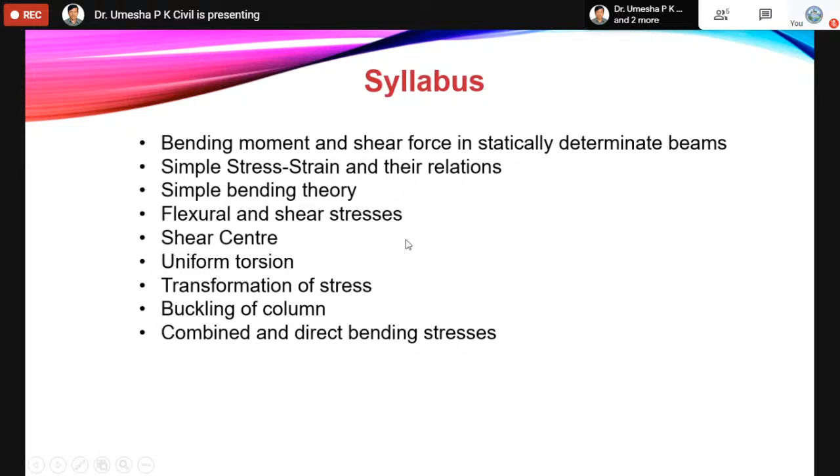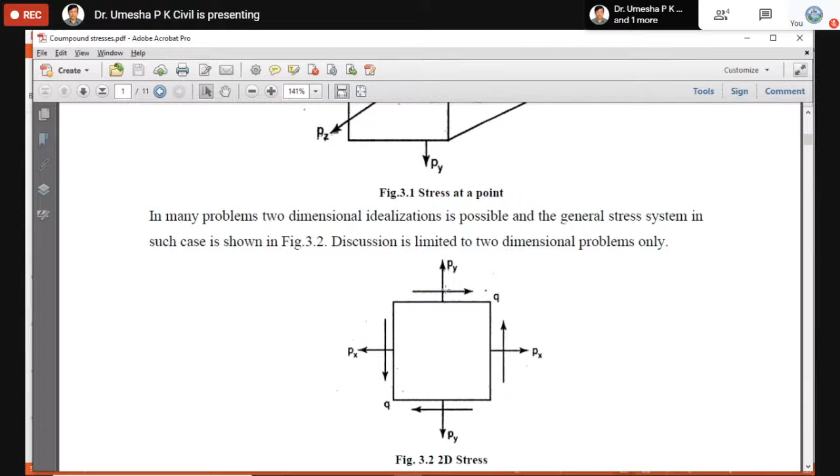We are interested to consider this idealized as a two-dimensional problem. It will have stress in X direction, stress in Y direction, and also shear stress Q, present on all four sides. That is the idealization to the two-dimensional problem.

So if you see the stress on the inclined plane, we are interested to know what is the stress on the inclined plane, that is the normal stress and the shear stress, if it is subjected to uniaxial direct stress, biaxial direct stress, and also general two-dimensional stress.

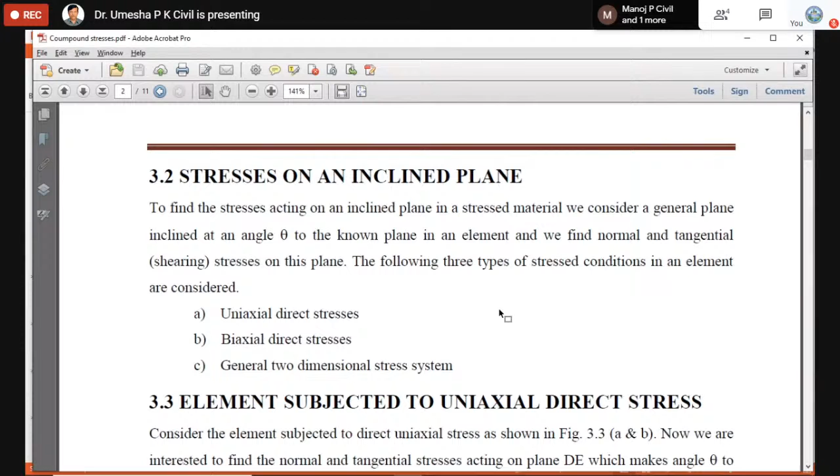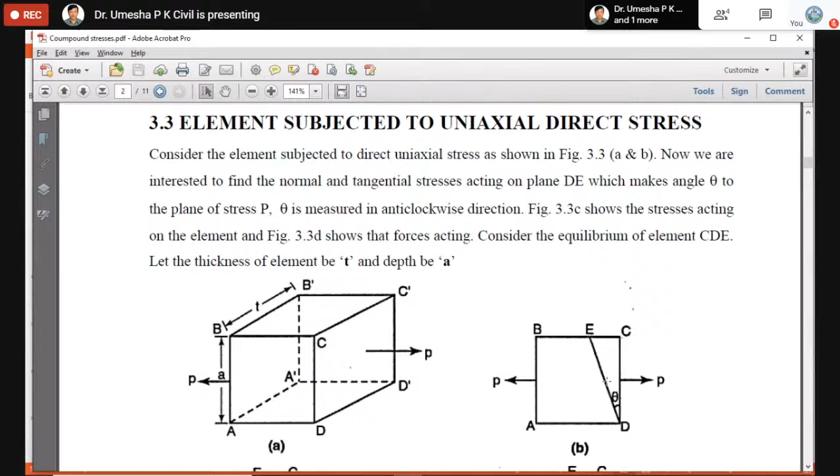Firstly, let us take a case subjected to uniaxial direct stress like this. We are interested to know the normal stresses at a plane inclined at theta to the vertical plane. P will be the value acting in the X direction. We are interested to know what is Pn, the normal stress, and the tangential stress.

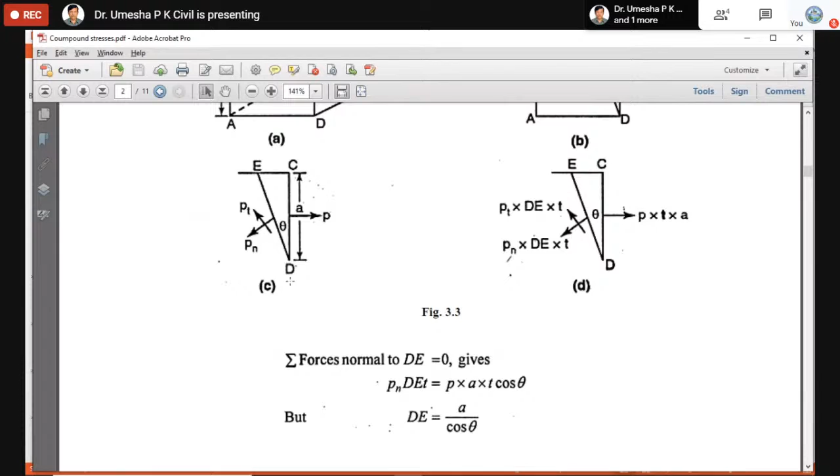That can be resolved in X direction and Y direction and equated, and we get Pn is equal to P into cos square theta, where P is the actual stress acting in the uniaxial direction and theta is the angle with respect to vertical. So Pn, the normal stress acting on the inclined plane, is equal to P into cos square theta. Similarly, after simplifying, Pt is equal to P by 2 into sine 2 theta.

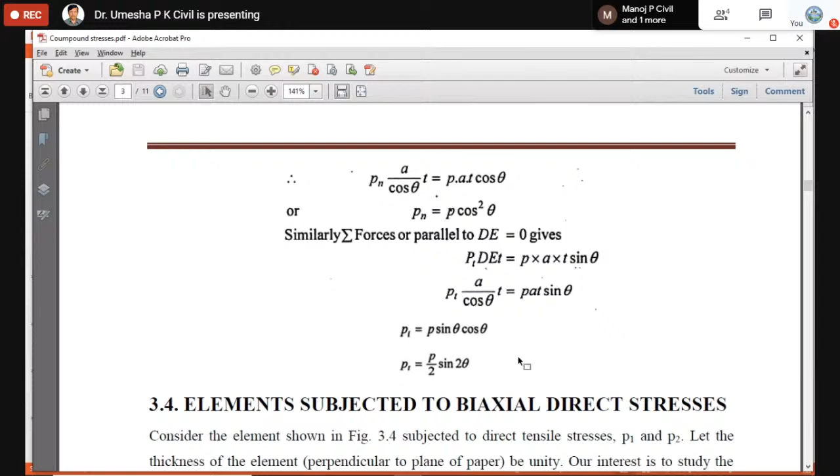Now take a case of biaxial direct stress, where you will have stresses in both directions, that is P1 and P2. We are interested to know the normal stress on an inclined plane, inclined at an angle theta with respect to vertical. So it will have P1, P2, and if you resolve them in X direction and Y direction, we can get the Pn.

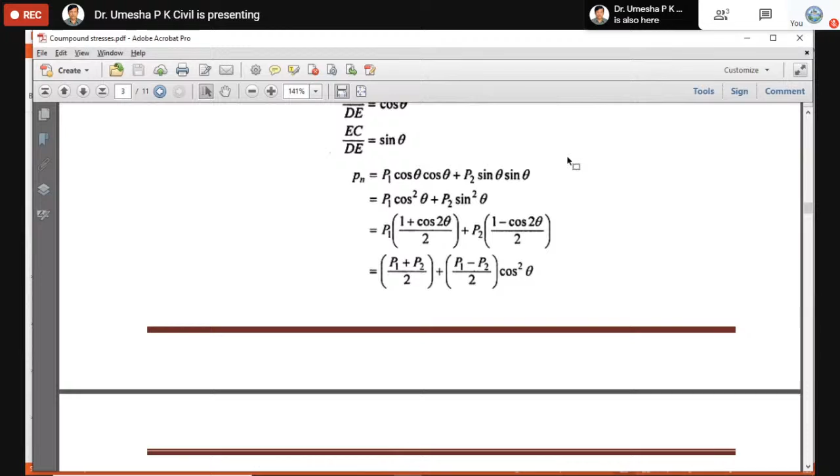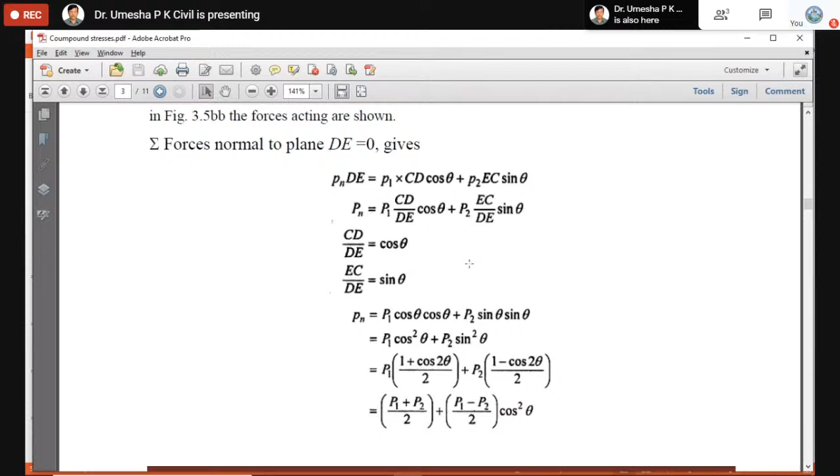After resolving both of them and taking sigma x equal to 0, that is forces in the normal direction equal to 0, we get Pn. Pn, the normal stress in the inclined plane at an angle theta, is equal to P1 plus P2 by 2, plus P1 minus P2 by 2 into cos square theta, where P1 and P2 are the stresses acting in bidirectional stresses, P1 in the X direction and P2 in the Y direction, and theta is the angle with respect to vertical. So Pn is the normal stress on the inclined plane, and similarly Pt, the tangential stress or shear stress on the inclined plane, is equal to P1 minus P2 by 2 into sine 2 theta.

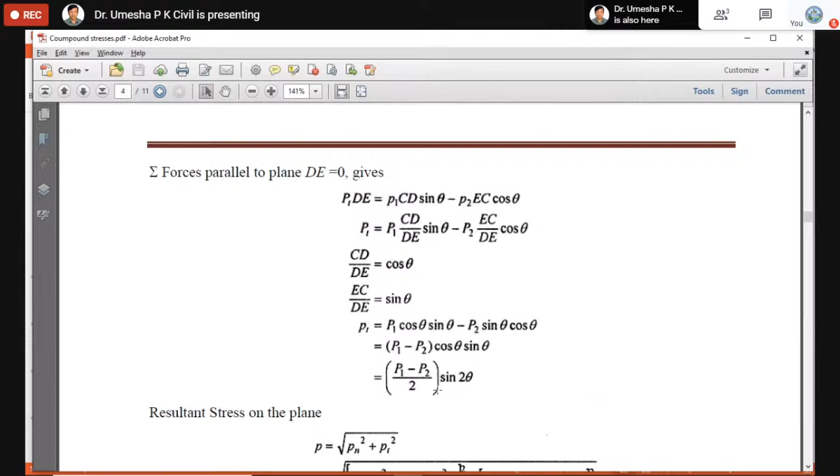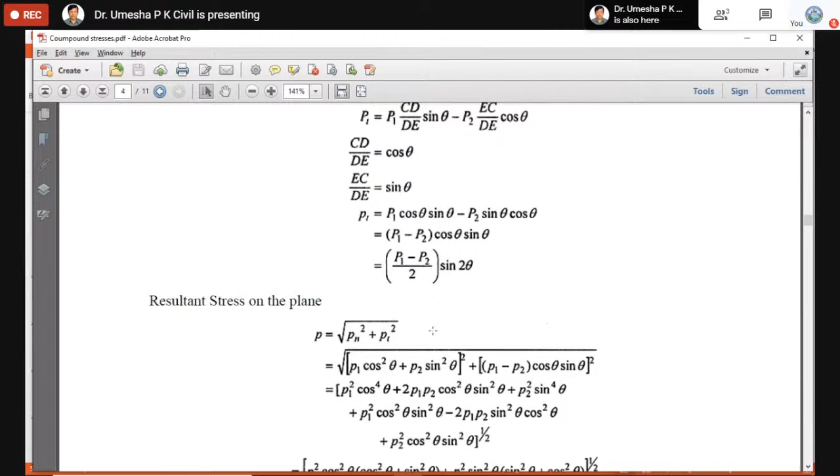If we take the resultant force, P square is equal to Pn square plus Pt square. So it can be written as P is equal to square root of Pn square plus Pt square. After simplifying, you get square root of P1 square cos square theta plus P2 square sine square theta. The angle phi, that is the angle between the resultant stress P and the given plane, is given by tan phi is equal to Pn by Pt, which gives the inclination of the resultant stress.

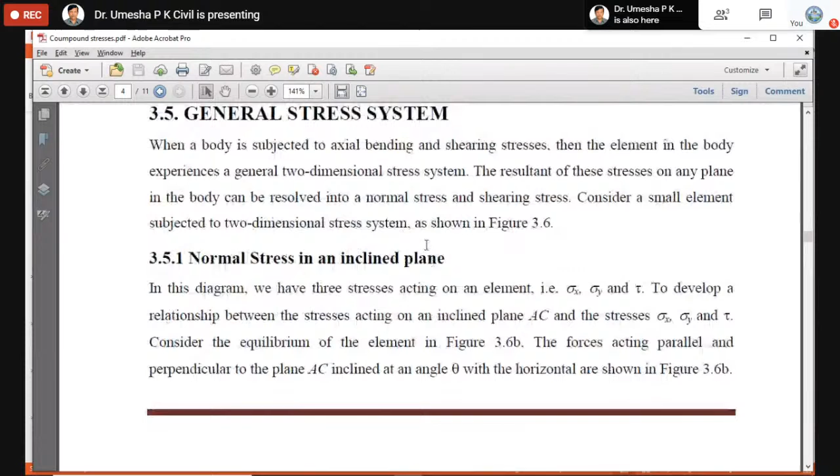In the general case, if you take a general stress system, we are interested to know the normal stress on an inclined plane when it is subjected to sigma x, sigma y, and tau or tau xy. This can be shown in the figure. In the x direction we have sigma x, in the y direction we have sigma y, and tau is the shear stress acting on the surfaces. We can resolve them in the x and y directions, applying the algebraic sum of the perpendicular forces.

So we'll be getting the angle, this is the angle with respect to horizontal. We are giving theta as the inclined plane's angle theta with respect to horizontal. We are interested to know what is sigma theta and tau theta. Sigma theta is the normal stress acting on the inclined plane, and tau theta is the shear stress acting on the surface of AC.

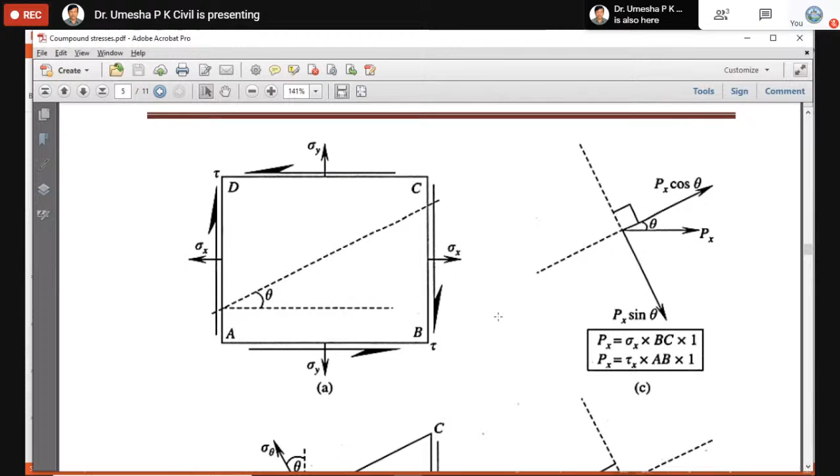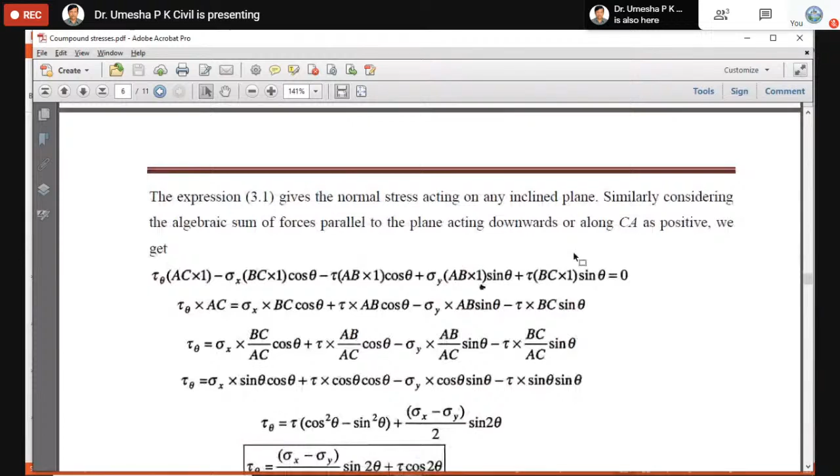After solving everything, we get sigma theta is equal to sigma x sine square theta plus sigma y cos square theta plus tau into sine 2 theta. This is the expression you should remember for the general case, subjected to biaxial stress and shear stress. Sigma theta at an inclined plane at angle theta is given by this value. Similarly, the tangential stress, that is the shear stress acting on this plane, tau theta, after solving, is equal to sigma x minus sigma y by 2 into sine 2 theta plus tau cos 2 theta.

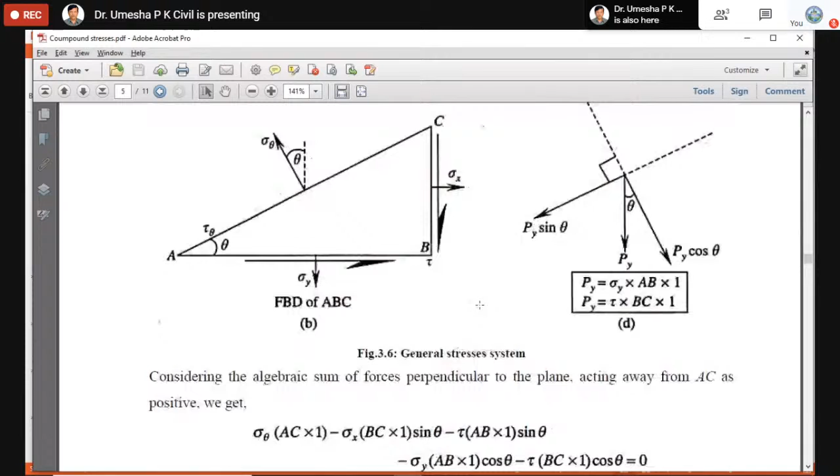This is the expression. All tensile forces are considered as positive, and shear stress developing in the clockwise direction is treated as positive. So you can consider that positive means it is a clockwise direction.

If you see in the figure here, with respect to x direction, it will be having the clockwise direction, so that will be considered as positive. So we'll be getting sigma theta and tau theta. That is the general expression. Once you know that general expression, we are interested to know what is the maximum normal stress on an inclined plane.

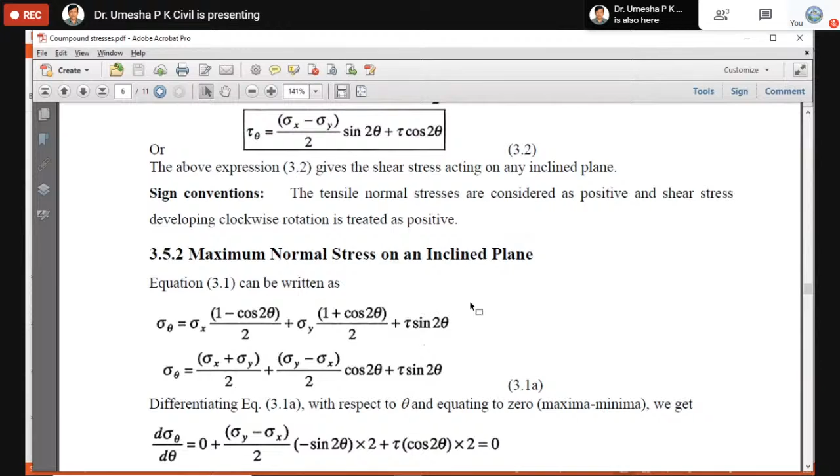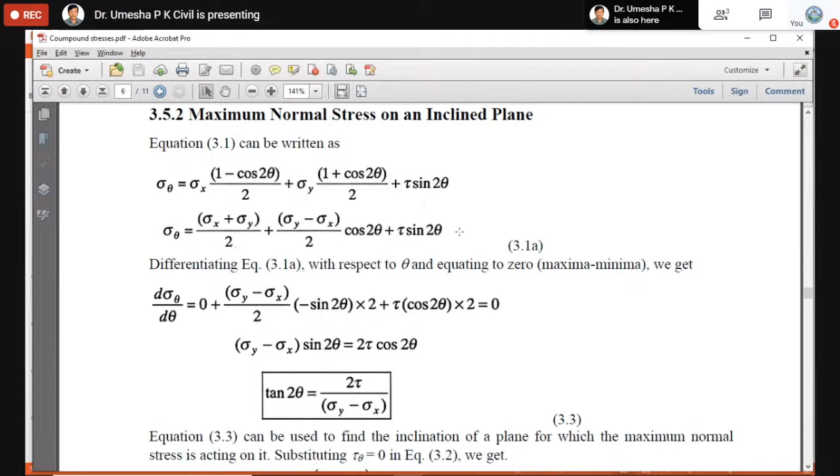So this is the inclined plane, tan 2 theta is equal to 2 tau divided by sigma y minus sigma x. The expression is sigma theta equals sigma x plus sigma y by 2, plus sigma y minus sigma x by 2 into cos 2 theta, plus tau sin 2 theta. So tan 2 theta gives the inclined plane where it is acting.

After knowing that, we wanted to know this tan 2 theta, which we got. Then we are interested to know the principal stress and principal planes. What is the principal plane? The principal plane is where the shear stress is absent. So we take the shear stress formula and equate it to 0.

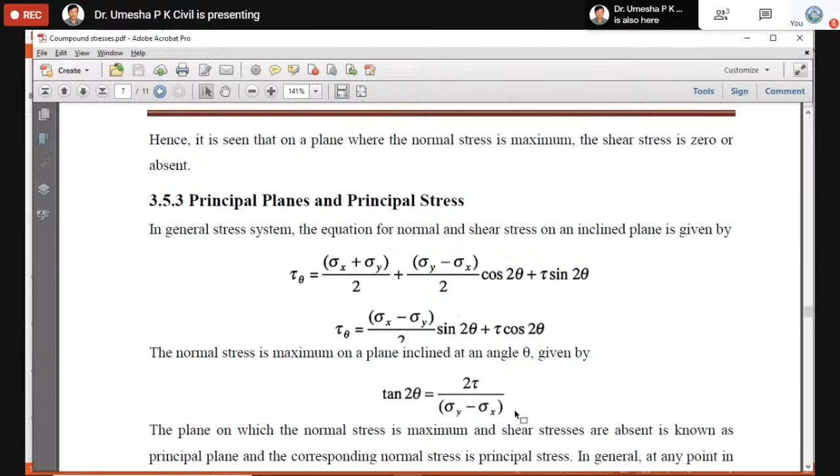So we will be getting the plane for tan 2 theta equal to 2 tau divided by sigma y minus sigma x. From this, you can calculate the principal stresses P1 and P2, since the shear stress is 0 on the principal planes. So sigma n1 and sigma n2, after simplifying, we will be getting this form.

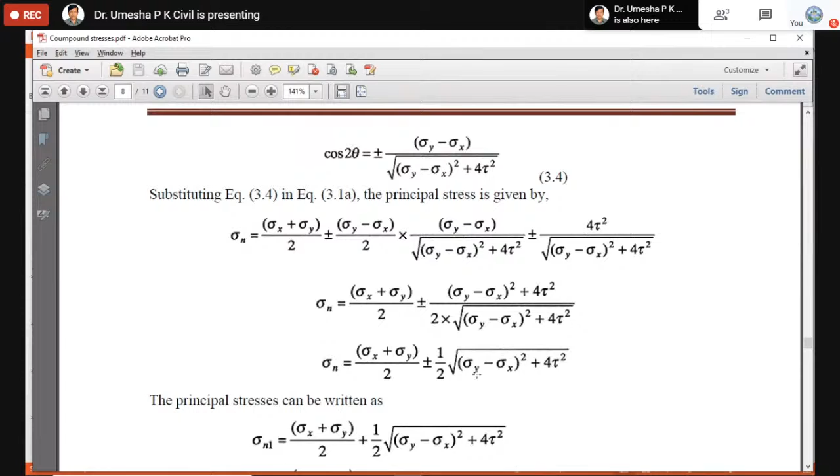So we'll have the sigma n, the normal stress, that is principal stress, equal to sigma x plus sigma y by 2, plus or minus square root of sigma y minus sigma x whole square plus 4 tau square, divided by... After simplifying, sigma n is equal to sigma x plus sigma y by 2, plus or minus half into square root of sigma y minus sigma x whole square plus 4 tau, sometimes called tau xy, square.

That is the major principal stress, you will be having the plus sign, and the minor principal stress will be with the minus sign. So this is the expression, we should remember that one.

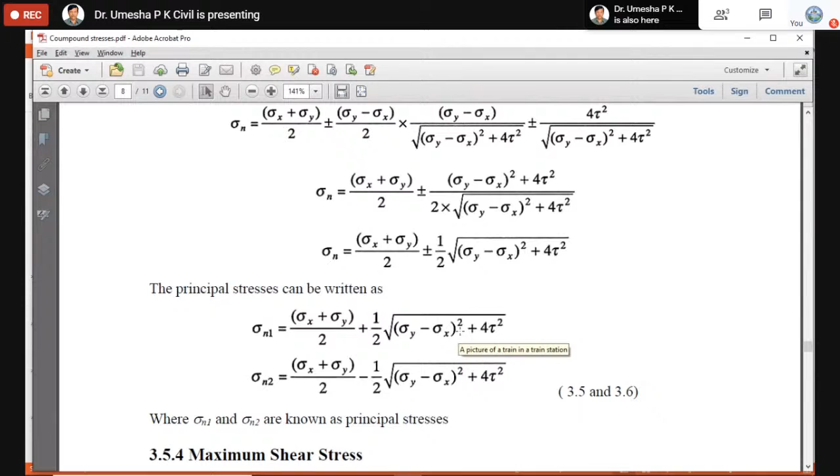Once you know the principal stresses, that is major and minor principal stresses, we can calculate the maximum shear stress in terms of sigma x and sigma y. This is the expression. If you substitute with respect to principal stresses, we'll be getting the expression like this.

So you'll get the expression tau max is equal to plus or minus half into square root of sigma x minus sigma y square plus 4 tau square. Or in terms of principal stresses, tau maximum is equal to plus or minus half into sigma n1 minus sigma n2, that is the principal stresses.

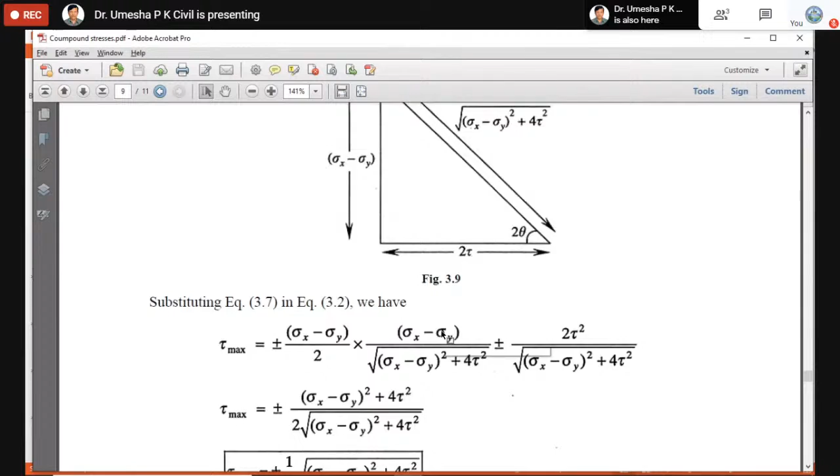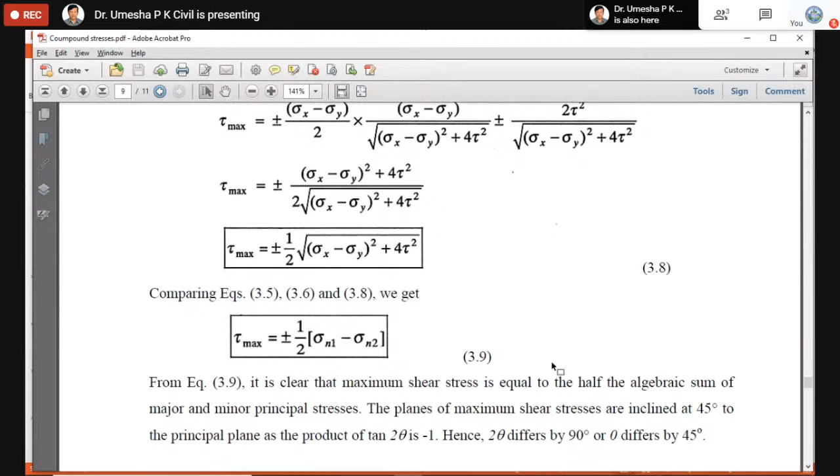We should remember all these formulas given here, as that will be useful to solve problems in the GATE exam. If you remember all this formula, it will be very easy to solve the problems. Now I'll take some examples in compound stresses.

If you see here, we have the compound stresses, that is a biaxial loading case. Let us take this problem: for the plane stress situation shown in the figure, the maximum shear stress and the plane on which it acts are to be found. This is the plane stress situation given: sigma x is equal to 100 MPa, sigma y is equal to 100 MPa. We want to know the maximum shear stress and the plane.

So they have given options like this, four options A, B, C, D. The first option is minus 50 MPa on a plane 45 degrees clockwise with respect to the x-axis, or minus 50 MPa on the plane 45 degrees anti-clockwise direction with respect to the x-axis, or 50 MPa in all directions.

And also it is 0. So we know the formula: tau theta is equal to sigma x minus sigma y by 2 into sine 2theta plus tau xy into cos 2theta. This is the expression for the shear stress. So if you substitute these values, sigma x and sigma y both are equal, so you will be getting 0. There is no shear stress, so this term will be 0. Hence tau theta is equal to 0 in all directions.

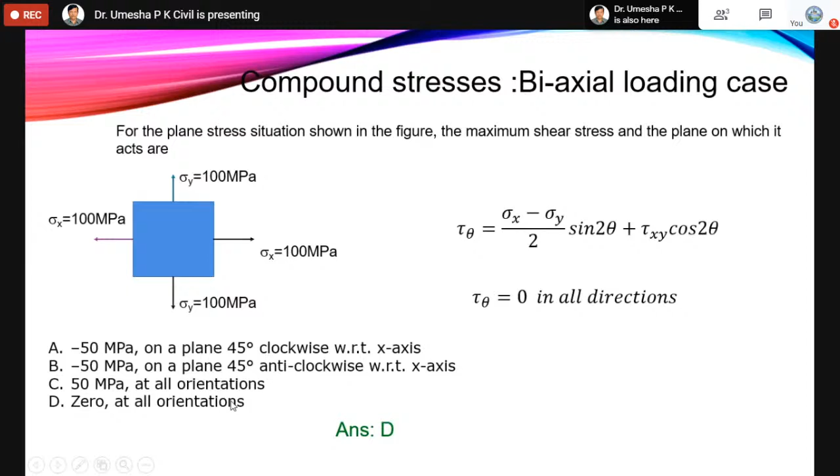So whatever direction is there, our answer will be D, 0 in all orientations. That is the thing they have given. So we'll take the next problem.

Tau max, in terms of principal stress, is equal to sigma 1 minus sigma 2 by 2, which equals square root of sigma x minus sigma y by 2 whole square plus tau xy square. In the expression you might have seen they have taken half outside; if you take it inside, that is the formula. So half comes inside, under the square root it becomes 4, and that 4 gets cancelled, so you get the expression: half of square root of sigma x minus sigma y whole square plus 4 tau xy square. This is the expression if you take it inside. So if you substitute all these values of sigma x, sigma y, and tau xy in the expression, we will be getting 50 MPa as the maximum shear stress.

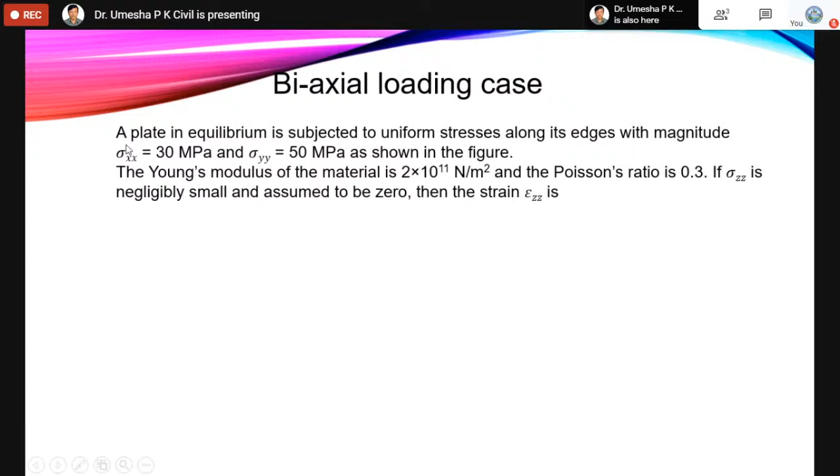So okay, we'll take another problem. A plate in equilibrium is subjected to uniform stresses along its edges with magnitudes as given. There will be nomenclature: sigma xx, or sometimes sigma x, will be there in the x direction only. Sigma xx equal to 30 MPa, sigma y is equal to 50 MPa as shown in the figure. The Young's modulus of the material is 2 into 10 to the power 11 Newton per meter square, and the Poisson's ratio given is 0.3. If sigma zz is negligibly small, assumed to be 0.

And what is the strain, that is epsilon zz? So they have given, either you can write sigma xx or sigma x, both will be same. So sigma x is equal to 30 MPa, sigma y is equal to 50 MPa. We know the expression. They have given the answers like this: first one is minus, and strain is a unitless value. So they have given 4 options: minus 120 into 10 to the power minus 6, minus 60 into 10 to the power minus 6, 0, and another option is 120 into 10 to the power minus 6. So we are interested to calculate the epsilon z, that is the strain in the z direction. So this is the value: sigma x is equal to 30 MPa, sigma yy is equal to 50 MPa, sigma z is equal to 0.

So we know the expression for strain in the 3-dimensional case. We can write: epsilon zz is equal to sigma zz divided by E, minus mu into sigma xx by E, minus mu into sigma yy by E. Since sigma zz is negligibly small and assumed as 0, the first term becomes 0. They have given mu value, mu is equal to 0.3, and E value given is in Newton per meter square. So MPa is Newton per millimeter square, so we need to convert all the things to either millimeter or meter and substitute in the expression.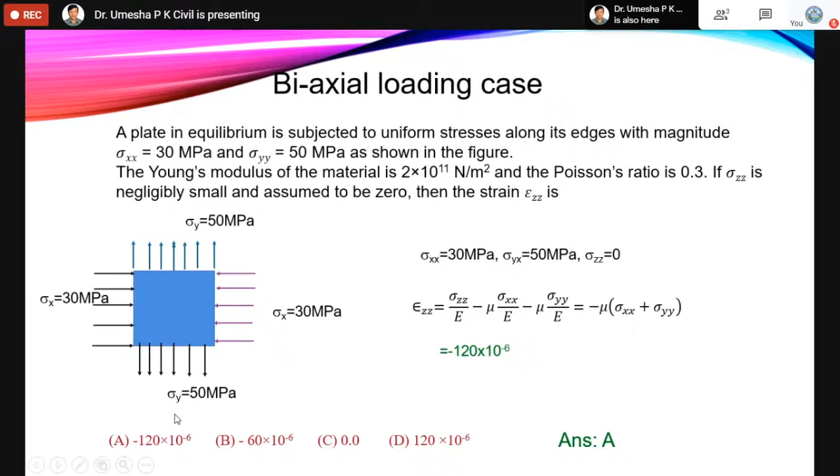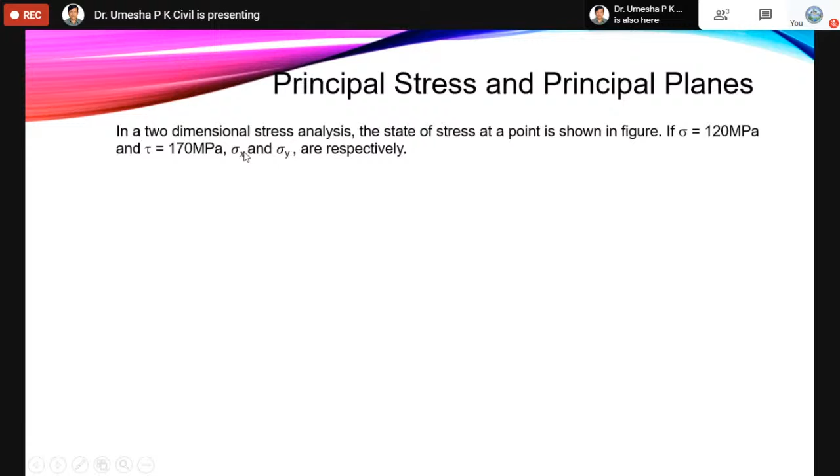They give the figure like this, with sigma and tau at an angle theta, given in terms of a triangle. Instead of giving the value of theta, they give the values: AB is equal to 4 units, BC is equal to 3 units, AC is equal to 5 units. So the problem is you have to calculate sigma x and sigma y using these values.

We'll see the options. They give 4 options, and we want to pick the correct one. We are interested to calculate sigma x and sigma y, which will be acting in the x direction and y direction. Now we'll see how to calculate that.

We know angle theta: sine theta is equal to opposite divided by hypotenuse, so sine theta is equal to 3 by 5. Cos theta is equal to adjacent by hypotenuse, that is 4 by 5. Tan theta is equal to opposite by adjacent, that is 3 by 4. Thus, from the force equilibrium, stress into area - take the unit thickness. So sigma x into AB, that is stress into area, and you will be resolving in the x direction first.

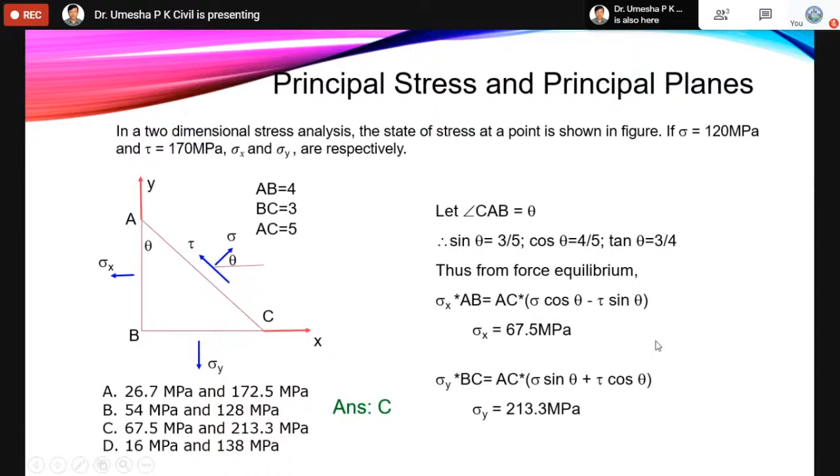So we'll come to the next problem. If the principal stresses in the two-dimensional case are minus 10 MPa and 20 MPa respectively, then the maximum shear stress at the point is to be found. They want to calculate what is the maximum shear stress. They are given 4 options: 10 MPa, 15 MPa, 20 MPa, and 30 MPa. So we know the formula: the maximum shear stress can be written in terms of the difference of principal stresses divided by 2.

Sigma 1 will be the major principal stress, sigma 1 is equal to 20, and sigma 2 is equal to the minor principal stress, that is minus 10 MPa. So minus of minus becomes plus: 20 plus 10, divided by 2, is equal to 15 MPa. Always remember the higher value will be the major principal stress, then the lower value is the minor principal stress. So sigma 1 minus sigma 2 divided by 2. We'll be getting the value tau max is equal to 15 MPa. So option B is correct in this one.

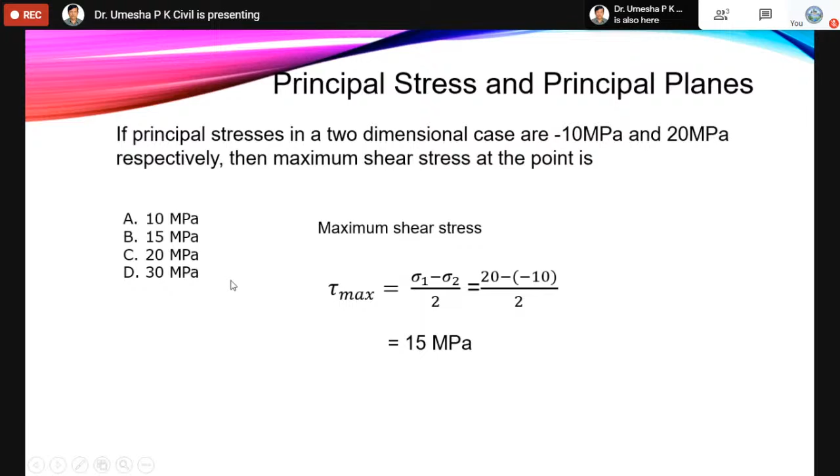Now we'll take another example. An axially loaded bar is subjected to normal stress. They are given only normal stress, 173 MPa. The shear stress in the bar is to be found. So we will be confused by this one: only normal stress is given, what is the shear stress? So they ask us to select from this. Now let's see how the formula works.

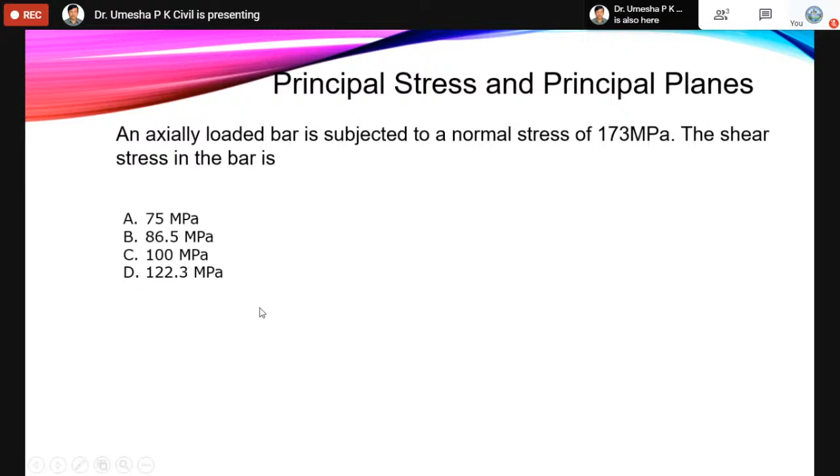Maximum shear stress is equal to... So what they have given is only normal stress, meaning principal stress only in one direction is given. So maximum shear stress will be sigma 1 minus sigma 2 divided by 2, that is equal to 173 minus 0, since they are given only one normal stress, that will be the major principal stress, and the minor principal stress is equal to 0. Substituting the value for tau max, sigma 1 minus sigma 2 by 2, we get the value 86.5 MPa.

So initially, if you see the problem, you will get confused. What, only normal stress is given, how to calculate the shear stress? We should remember that when only normal stress is given, that will be the principal stresses acting on the x direction and y direction, so sigma 1, sigma 2. So you'll get this tau maximum.

So we'll take another problem. The answer will be B in this case.

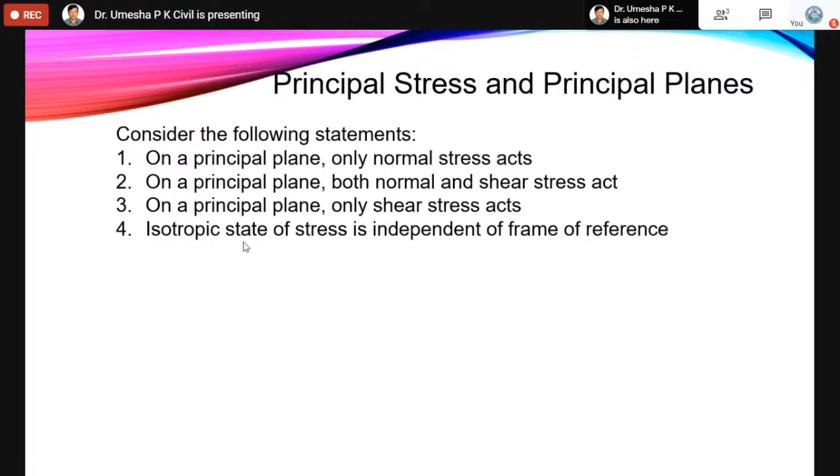So consider the following statements. On the principal plane, only normal stress acts. On the principal plane, both normal and shear stress act. On the principal plane, only shear stress acts. Fourth: the isotropic state of stress is independent of the frame of reference. Now they've given different statements, and they give the options like this: which statement is correct or are correct? So they give 4 options.

So option 1 and 4: they give the first one, on the principal plane only normal stress acts, and the fourth one, the isotropic state of stress is independent of frame of reference. Then there's options 2 and 4, and 2 and 3. So which one is correct? On the principal plane, shear stress is 0, only normal stress will be there.

Only normal stress acts, so no shear stress on the plane. Looking at the different options: the second option, where both normal and shear stress act, cannot be taken. The third option, where only shear stress acts, is wrong. The first one is correct, but it is linked with option 4. There is no other way.

This isotropic state of stress is independent of the frame of reference. So option A is correct. Options 2 and 3 is not correct, 2 and 4 is not correct, 2 only is not correct. The first one, 1 and 4, is correct. So we have to select accordingly.

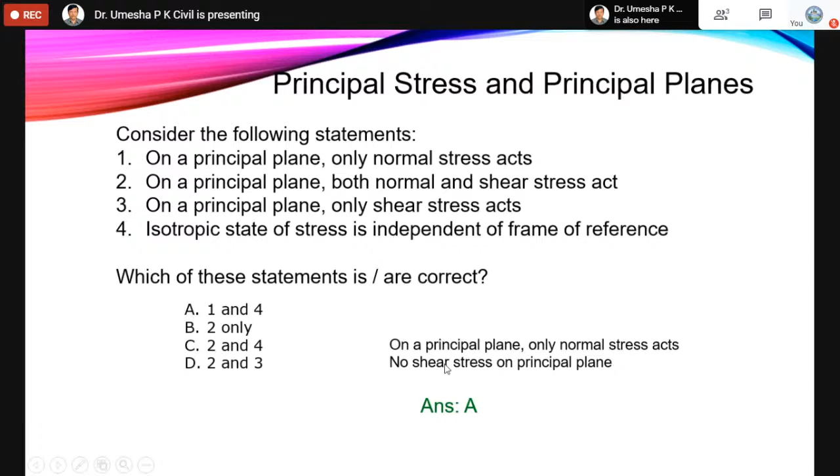Take another problem: if a small concrete cube is submerged deep in still water such that the pressure exerted on all faces of the cube is P, so the cube is submerged with pressure P acting in all directions. Then the maximum shear stress developed inside the cube is what we need to find. The options given are A equal to 0, or P by 2, P, or 2P.

So now this concrete cube will be exerted with different pressures, that is P in all 3 directions. All directions will have pressure P. What is the maximum shear stress? If you utilize the 2-dimensional formula, sigma max equals sigma, tau max is equal to sigma 1 minus sigma 2 by 2. In all directions the principal stresses will be equal, that is P minus P divided by 2. So this is the expression. Substituting, you get the value 0. So option A is correct.

Even though it has equal pressure in all three directions, we will equate it to only the two-dimensional case. So that is the answer, A is equal to 0.

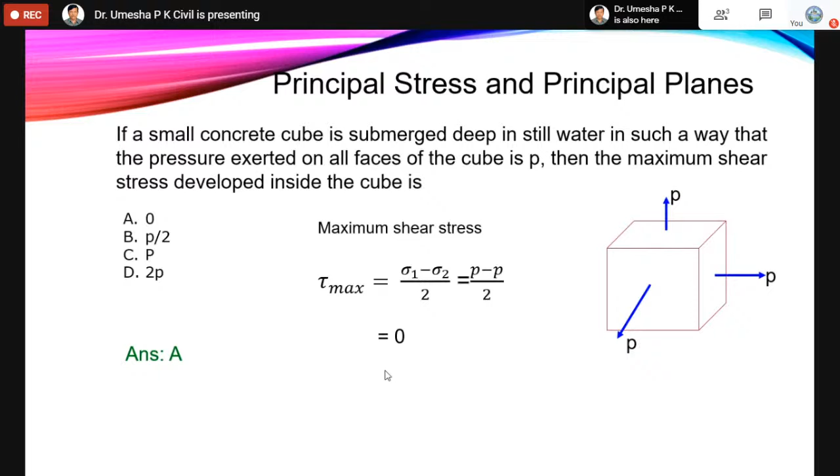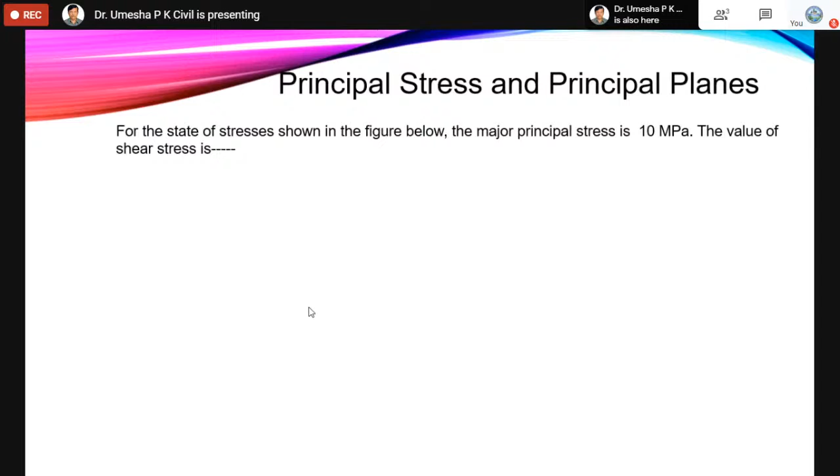So every problem is tricky. Now here is the given state of stress: sigma x is given, sigma y is given, but tau xy, the shear stress, is not given. Sigma x, sigma y, and the major principal stress are given.

So we know the expression. The options given are: the value of shear stress is equal to 10 MPa, 5 MPa, 2.5 MPa, or 0. So what is the maximum principal stress expression?

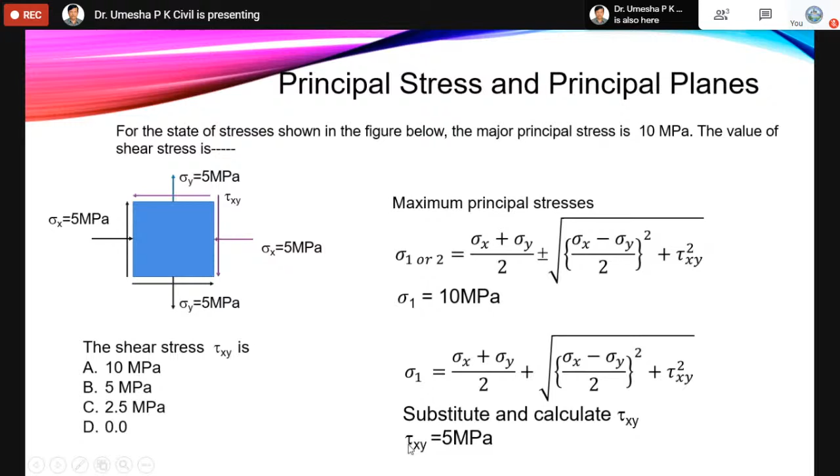We know sigma 1 or sigma 2 equals sigma x plus sigma y by 2, plus or minus square root of sigma x minus sigma y by 2 whole square plus tau xy square. They have given sigma 1 equal to 10 MPa, so take the sigma 1 expression with the positive value, substitute all the known values of sigma x and sigma y, with tau xy as the only unknown, and calculate. You will get tau xy equal to 5 MPa, which is option B.

So they are given indirectly - they gave the major principal stress, but they could give either the minor or the major principal stress. Accordingly, you have to take the expression as plus or minus, and from that you can calculate the remaining unknown.

So we'll take the next chapter, that is flexural and shear stresses. We know the different expressions in flexural and shear stresses, also called bending and shear stresses. I'll take directly some examples for a given shear force across a symmetrical I section.

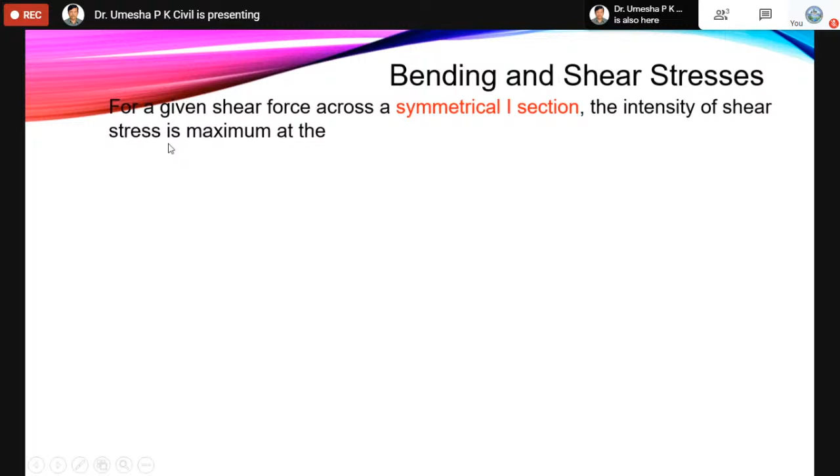Remember that for a symmetrical I section, the intensity of shear stress is maximum at the extreme fibers or centroid of the section, or at the junction of the flange and web but on the web, at the junction of flange and web but on the flange. This is the option given. So they have given a symmetrical I section - if unsymmetrical, it would be a different question. This I section about the x-axis and y-axis is symmetrical.

So what is the shear stress? It will be distributed like this: in the flange portion it will be reducing, and in the web portion it will be increasing. So Q maximum will be maximum at the centroid. So option B is correct - that is the centroid of the section. That is the correct answer because of the symmetrical I section. So answer B is correct.

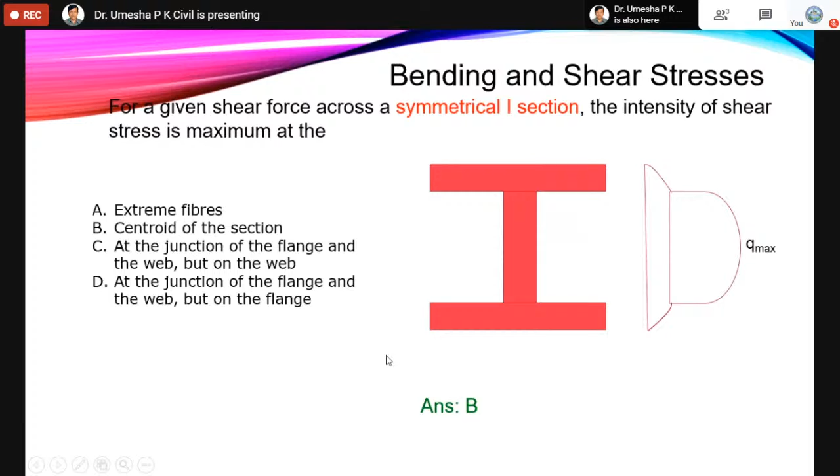Now, another example on bending and shear stresses: the maximum bending stress induced in a steel wire of modulus of elasticity 200 kilonewton per millimeter square and diameter 1 millimeter, when wound on a drum of diameter 1 meter, is approximately equal to.

So they've given a drum, and over that the steel wire will be wound. The steel wire has diameter 1 mm and the drum has diameter 1 meter. They want to know the bending stress induced. The options are 50, 100, 200, and 400 Newton per millimeter square.

We know the formula from bending theory: M by I equals E by R equals F by Y. That is, moment induced in the section divided by moment of inertia equals Young's modulus divided by radius of curvature, equals stress divided by Y, where Y is the distance measured from the centroid, the neutral axis.

E is given, so please convert everything to one unit. They gave kilonewton per millimeter square, so that becomes 2 into 10 to the power 5 Newton per millimeter square. From M by I equals E by R equals F by Y, either equation can be used. They've given the drum diameter as 1 meter, so the radius will be 500 millimeter.

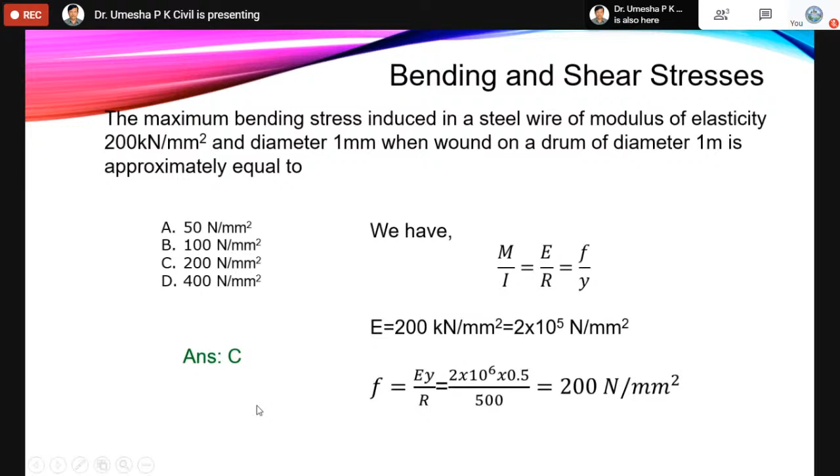So take another example on bending and shear stresses. Here a homogeneous simply supported prismatic beam of width B, depth D, and span L is subjected to a concentrated load of magnitude P.

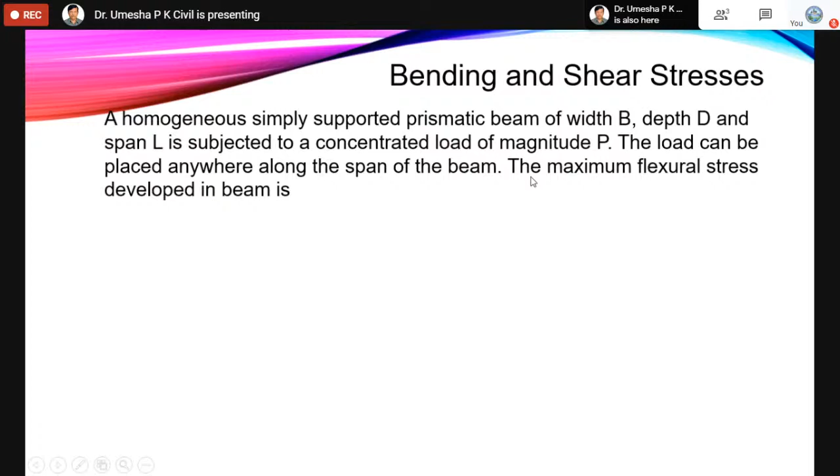So they've given the prismatic section, width and depth, and the span, subjected to magnitude P. The load can be placed anywhere along the span of the beam. The maximum flexural stress developed in the beam is asked. They are simply supported with the given prismatic section, and different options are given: A, B, C, D.

We know that when the concentrated load is placed at the midspan of a simply supported beam, we get the maximum bending moment. So maximum bending moment will occur at the midspan.

We have the formula M by I is equal to E by R is equal to F by Y. Using that, you can calculate the stress. The moment for a simply supported prismatic beam of span L, the maximum moment will be PL by 4, and the moment of inertia I is equal to BD cube by 12.

Using the ratio M by I is equal to F by Y, F is equal to MY divided by I. Substituting, you get 3 by 2 PL divided by BD square. We also know stress is equal to M by Z, so BD square by 6, if you substitute, you get the same value. So that is the expression: D is correct, 3 by 2 PL by BD square.

So remember, stress is equal to M by Z or MY by I, and the maximum stress will be at the outer surface.

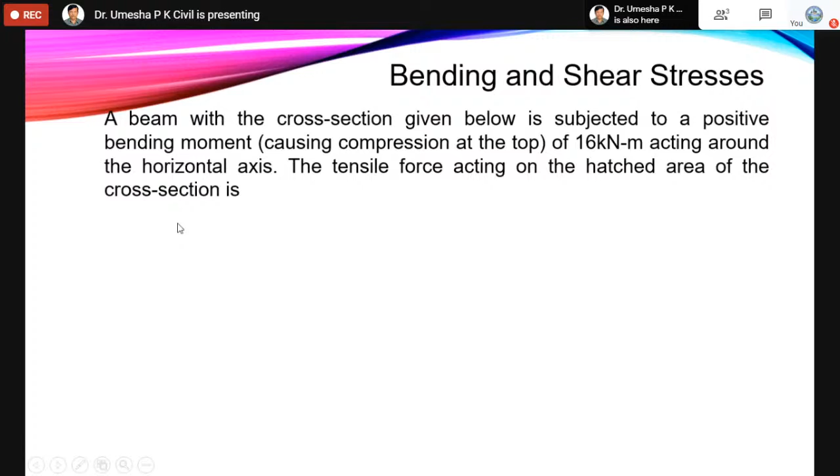The tensile force acting on the hatched area of the cross section is asked. They've given the section as shown below, subjected to a positive bending moment of 16 kilonewton meter, and we need to find the tensile force acting on the hatched area. So how to work this out?

What are the options? They are given as A, B, C, D: 0, 5.9 kilonewton, 8.9 kilonewton, 17.8 kilonewton. So the stress diagram can be written like this.

It is a positive bending moment of kilonewton meter around the horizontal axis, so this is the horizontal axis, where stress will be zero. This is the hatched portion below the neutral axis that is given, and we want to know the tensile force acting on this portion.

We are given the maximum bending moment, so we use M by I is equal to E by R is equal to F by Y, giving F equal to MY by I. The moment is given directly as 16 kilonewton meter, and Y, the distance shown, is 25 mm.

For I, the section is given as 50 plus 50, so B is equal to 100, and depth is 75 plus 75, that is 150. So BD cube by 12 is the moment of inertia. You can calculate the stress using F equal to MY by I. The moment is also given, so please convert everything to the same unit - that is important. Convert kilonewton meter into Newton millimeter, and keep the other dimensions in millimeter, with I in millimeter to the power of 4.

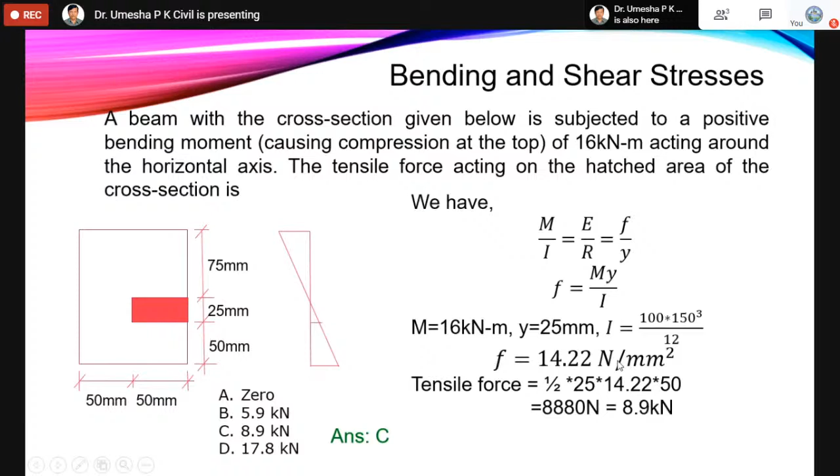Now we'll take another example. An I section of a beam is formed by gluing wooden planks as shown in the figure. This is the figure, it is glued like this on all four sides. If the beam transmits a constant vertical shear force of 3000 Newton, the glue at any of the 4 points will be subjected to a shear force in kilonewton per meter length.

So they want to know what is the shear force acting at the junction. They are given the values for A, B, C, D already, in kilonewton per meter length. That is A is equal to 3, B is equal to 4, 8, 10.7. So how to calculate that one?

So you have to know the shear stress. Here, the portion you are interested to know, you will take one portion ABCD. It is glued at this point. This is the shear flow acting in the I section like this.

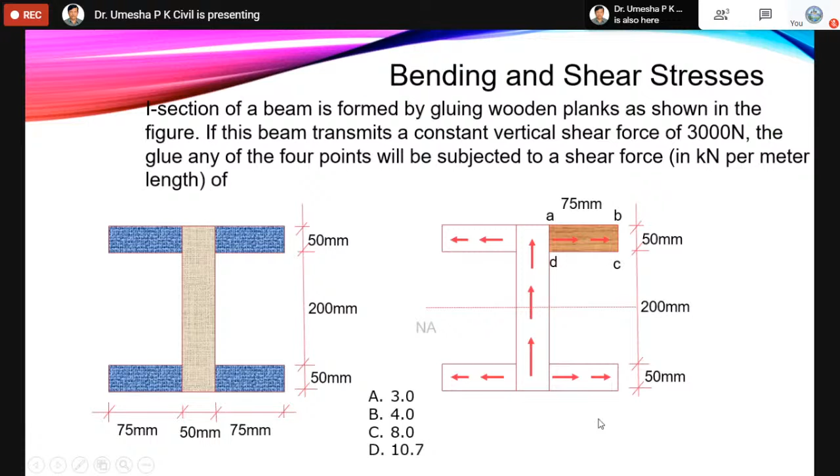This is the dimensions: 50 mm, 200 mm, 50 mm. So at the bottom also they gave 50, 75, 75. So this is the neutral axis. We'll see in the next page. So this is the value.

See here, consider the shaded portion. This is the shaded portion you have taken here, that is area ABCD of the plank. The shear flow Q is equal to shear force acting, the shear flow will be acting, that divided by I.

The shear flow is measured as force per unit length along the longitudinal axis of the beam, over the cross section as shown in the figure. Q is equal to A into Y bar, so whatever A is there from here, and Y bar from the neutral axis to the centroid of this section.

So the area of this one, 75 into 50, that is the area. Y bar is equal to, from the neutral axis, 200 by 2 plus another 25, that is 125. That, you will be getting the Q value. Okay, Q value will be this.

Then moment of inertia I of the section about the neutral axis. So you can calculate moment of inertia of the I section, take the total minus deduct this one. So you can calculate that, that will be 350 into 10 to the power 6 millimeters to the power 4. Then shear force, they are given in the problem, previously I saw in the previous page, that is P is equal to 3000 Newton.

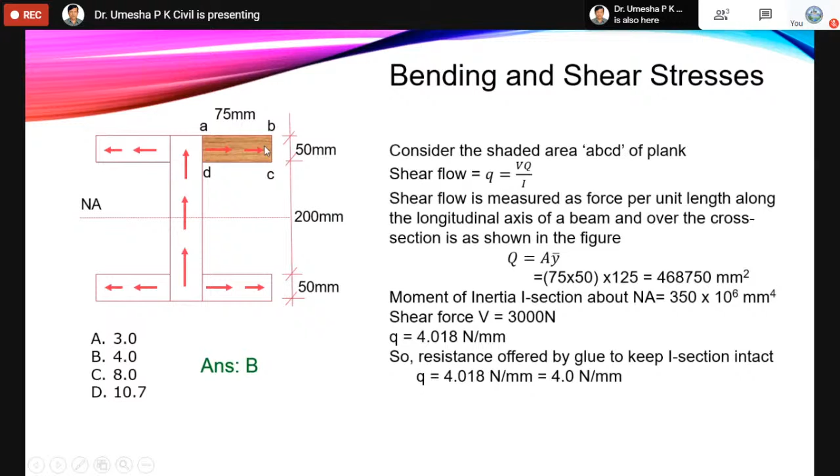Okay, we'll take another example. The shear stress at the neutral axis in the beam of a triangular section with a base of 40 mm and height 20 mm subjected to shear force 3 kilonewton.

So what is the value of shear stress at the neutral axis they wanted to know. This is the triangular portion.

They given the base 40 mm, height equal to 20 mm. If you take the centroid of that triangle at 2/3 from the top, 2/3 of 20 equals 40 by 3, that is 40 by 3 from the top. So what is the width? Width you have to calculate, that is this point. So width at a distance 40 by 3 from the top will be equal to this point.

You can take the similar triangle, you can calculate 80 by 3, you will get in millimeter, and shear stress tau is equal to shear force times A y bar by IB. Here the shear force they given is 3 kilonewton, that is converted into Newton.

Area: from this one above, from the neutral axis, what is above that you have to calculate the area, that is half into base, you calculate the base width, that is 80 by 3, and the height is equal to 40 by 3, and y bar of this portion, that is 1/3 from the bottom, 1/3 of 40 by 3 y bar.

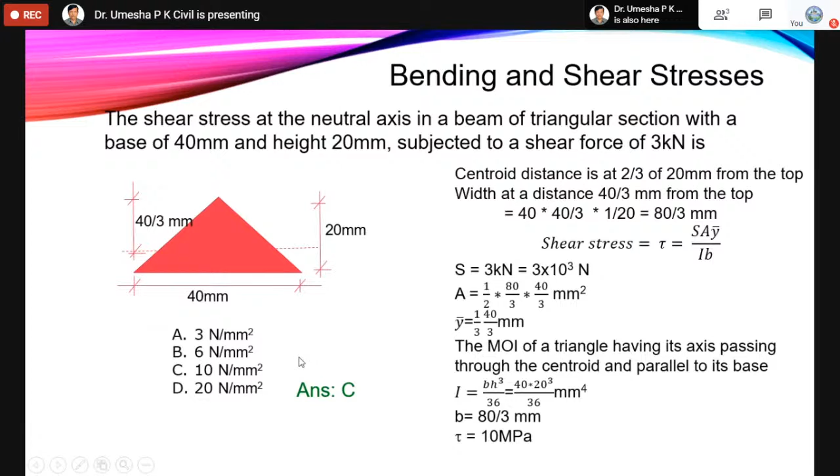So stress will be in Newton per millimeter square. If they are not given, if we see here in the answer, it will be in Newton per millimeter square. So take another example.

Maximum tensile stress at the section XX shown in the figure. This is a figure. So they wanted to know what is the maximum tensile stress at the section XX. They given 4 options.

So we'll take the free body diagram of this one. The x-axis will be there. This is the force acting at this point P. This is the centroidal distance for this portion. So when it comes to the x-axis, the section reduces from d to d by 2.

Hence this axial force can be transferred into axial force and a moment, P and a moment, okay, acting at the centroid of this portion, that is d by 2. So this is a free body diagram of this portion. Now you see how it will be.

So the maximum tensile stress at the section XX will be: stress is equal to P by A plus M by Z. So now you translate the value, whatever value acting, to the centroid of this portion. P by A plus M by Z.

So at the section XX, what is the area? This is a breadth B they given, and here only d by 2 will be there. So area is equal to BD by 2, and moment will be P into d by 4, that is the moment. Z, what is Z? BD square by 6, so D is equal to D by 2 here. That is Z you can calculate and substitute in the above equation, that is P by A.

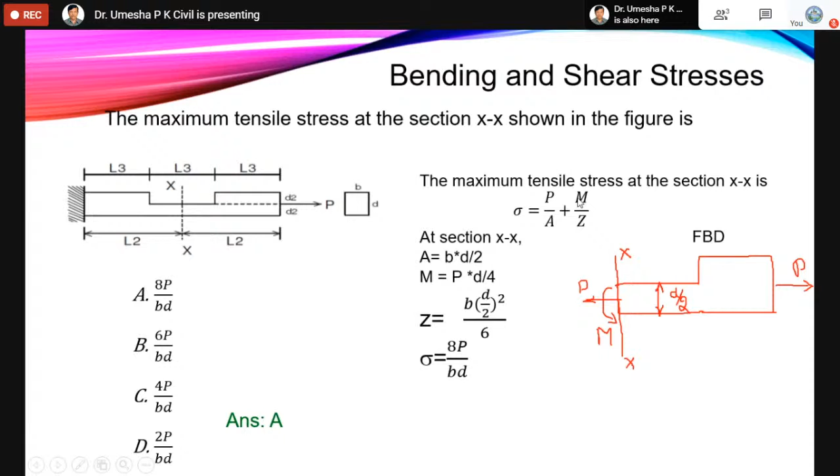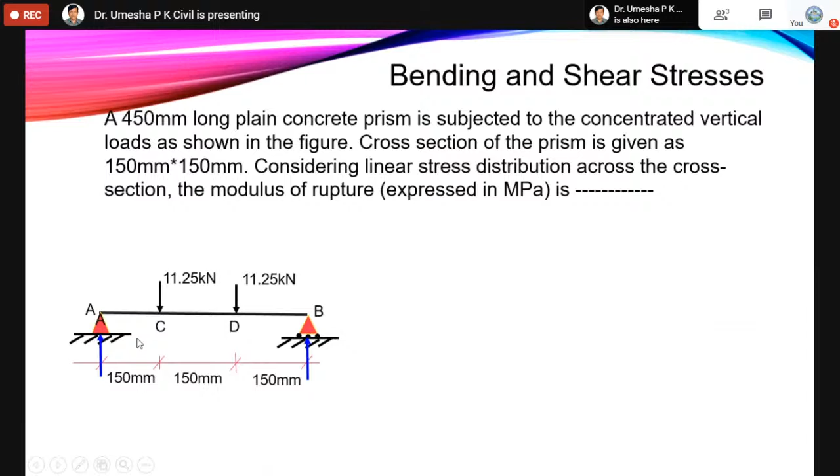So we'll take another example. A 450 long plain concrete prism is subjected to a concentrated vertical load as shown in the figure. The cross section of the prism is 150 by 150. Consider the linear stress distribution across the cross section. They want to know the modulus of rupture in MPa. The figure shows a simply supported beam with a roller support and a hinge support, and 11.25. The reactions can be calculated since both are equal distance from the support, so both reactions will be equal.

Once you know the reactions, you can calculate the moment. Moment at C equals 11.25 into 150 Newton millimeter, and y equals the section of the given prism: 150 is the depth, 150 divided by 2 is y at the exterior portion, and the moment of inertia is BD cubed by 12, so 150 to the power 4 by 12 gives the moment of inertia. Then stress equals M by I into y. Substituting, you get 3 MPa. So the modulus of rupture, the answer is 3 MPa.

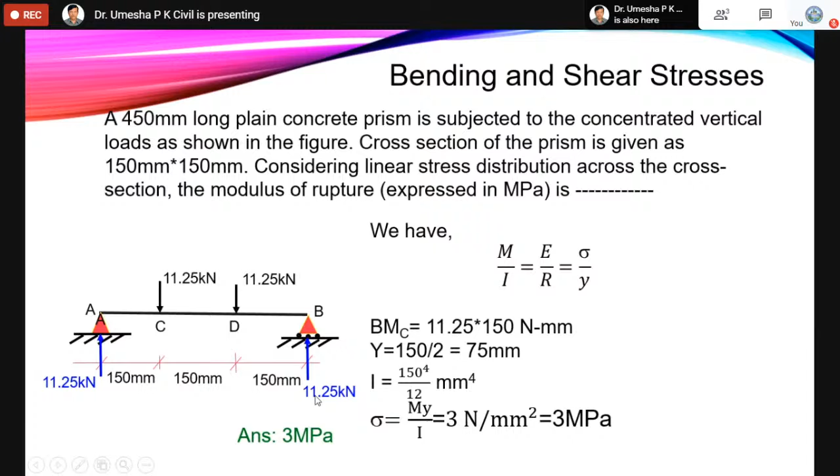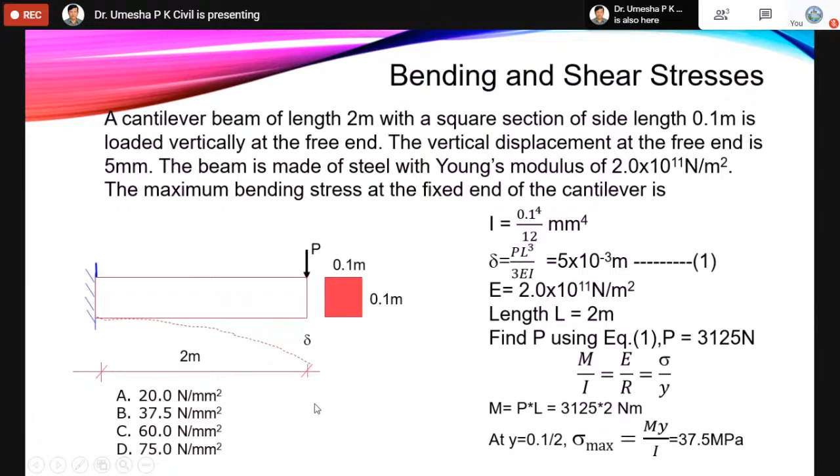From the expression M by I equals E by R equals sigma by y, moment equals P into L, that is 2 meter. Since P is calculated, we know the moment, and the depth from the neutral axis is 0.1 by 2. So sigma max equals My by I. Substituting, you get 37.5. The answer B is the correct answer.

So now we will take up the problems in slope and deflection of beams.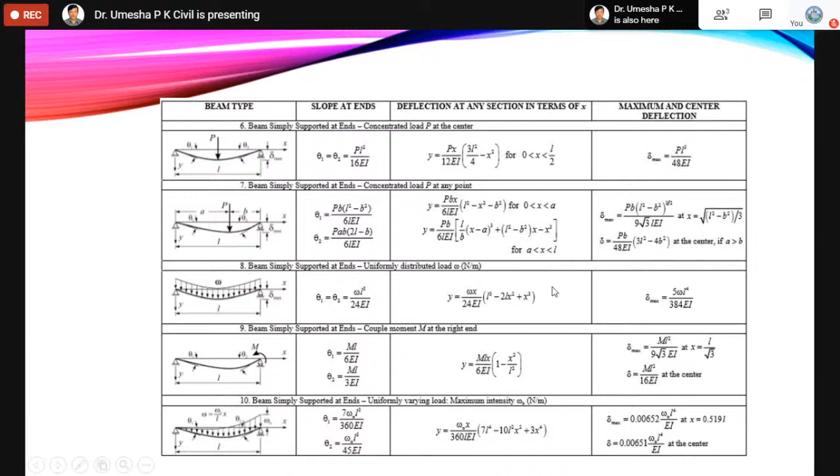So we'll take up some problems. A cantilever beam of span L is subjected to a downward load of 800 kilonewton uniformly distributed over its length, and a concentrated upward load P at its free end. For the vertical displacement to be zero at the free end, find the value of P.

So what they've given here is the total value of the UDL, that is 800 kilonewton over a length L, for a cantilever beam, and they want to know P acting at the free end such that the vertical deflection is zero there. So what is the value of P so that we can arrest that deflection? This is the expression, and different options are given.

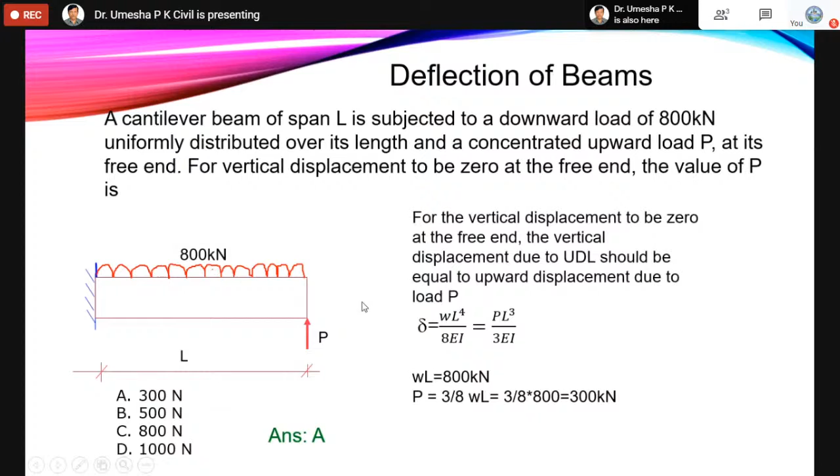For the vertical displacement to be zero at the free end, the displacement due to UDL should equal the upward displacement due to P. So deflection due to UDL equals deflection due to the concentrated upward load. Equating them: WL^4/8EI equals PL^3/3EI, where W equals 800 kilonewton. Solving, P equals (3/8)WL, giving P equal to 300 kilonewton. With 300 kilonewton, the deflection at the cantilever tip is arrested.

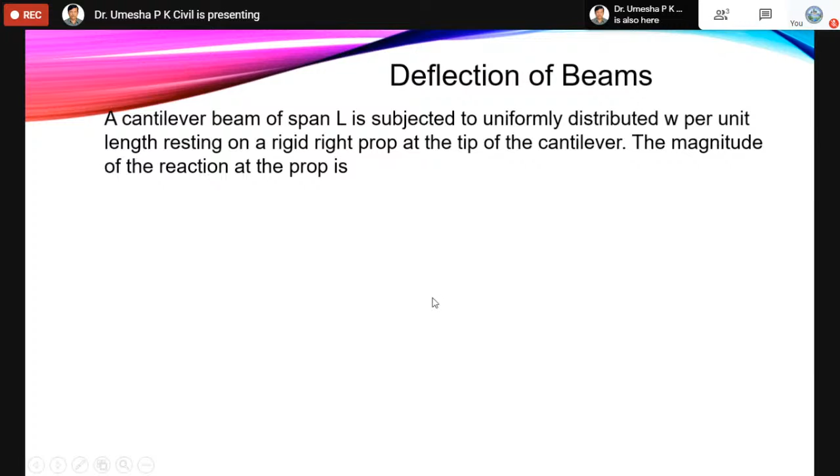We'll take another problem. A cantilever beam of span L is subjected to a uniformly distributed load W per unit length, resting on a rigid prop at the tip. We need the magnitude of the reaction at the prop. Again here they give values in terms of load per unit length, and we calculate similarly. They give directly the values, so the reaction R will be at the tip at the prop support.

Deflection at the prop support equals zero, so the expression is WL^4/8EI minus R, where R is the reaction, equals RL^3/3EI. Solving, we get R in terms of WL, that is R equal to 3WL/8. So option C is correct.

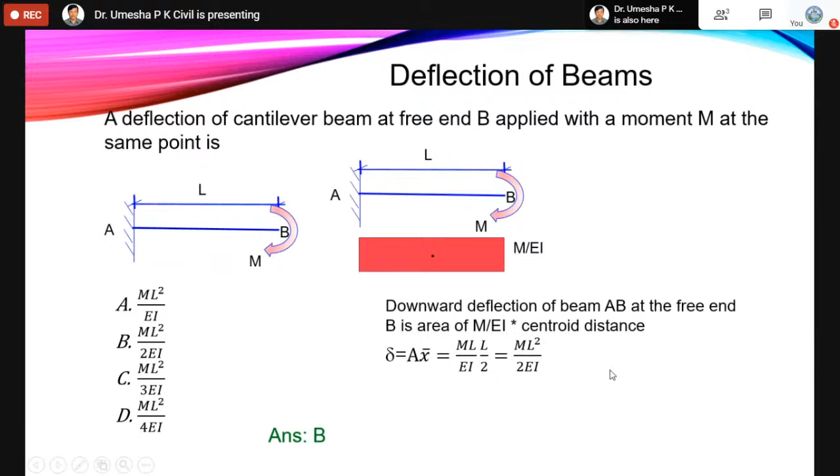Okay, then we'll take another example.

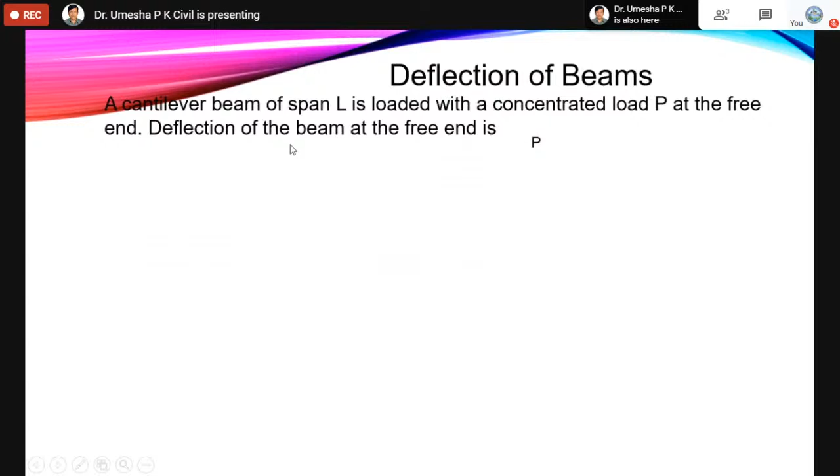A cantilever beam of span L is loaded with a concentrated load of P at the free end. The deflection of the beam at the free end is easy if you remember the formula, you can directly put the value. Otherwise, go to the M by EI diagram. The M value at the point is equal to P into L, PL by EI. So we can calculate the downward deflection of beam AB at the free end, that is area of M by EI into centroidal distance. Area is equal to half into base into height, into 2/3 of the length from here, giving PL cubed by 3EI. So option C is correct.

Okay, so we'll take another example. A cantilever beam is shown in the figure.

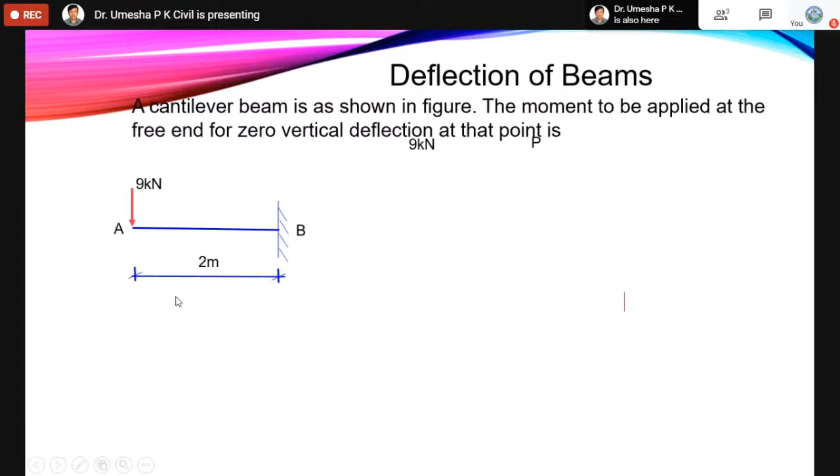The moment to be applied at the free end for zero deflection at the point is. So they want to know the moment to be applied at the free end for zero vertical deflection. Previously we calculated the vertical support. Now for the point load, they give the vertical force and apply the equivalent moment in the reverse direction so that it can arrest the deflection. They've given different options here, so the problem can be written like this.

They've given the cantilever with a vertical load, which we can write as an M by EI diagram. In the opposite direction we will have the moment, that is in the clockwise direction, while the other is in the anti-clockwise direction. Both will be equal, and the deflection at this free end, that is A end, will be 0. So what is the deflection for this one? Add both the things, you will get 0.

So the downward deflection of beam AB at the free end is the area of M by EI and the centroidal distance. First this is a negative one. So A into X bar, if we take half into base into height, that is 4 by 3. And here M by EI into the length into the centroidal distance. So we can calculate from this, M is equal to, in the clockwise direction. They're confusing because they've given both clockwise and anti-clockwise, but it should be in the clockwise direction, reverse to this one. So the moment will be applied at that point in the clockwise direction. Option C is correct.

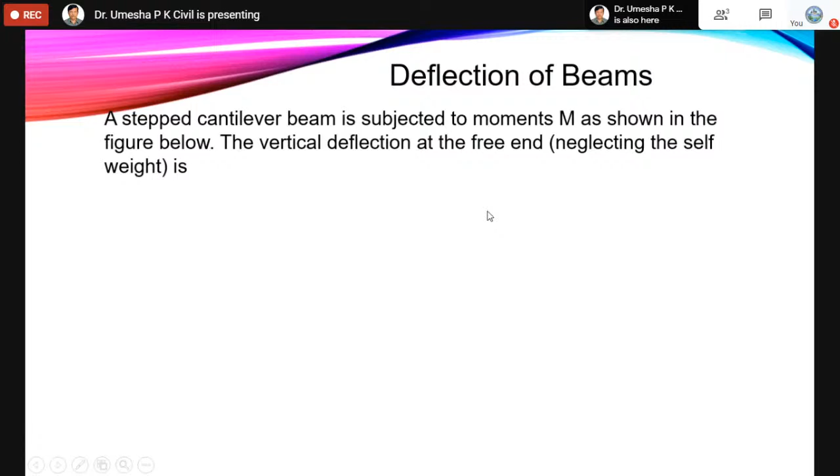We'll take another problem with deflection. A stepped cantilever beam is subjected to a moment M, as shown in the figure. The vertical deflection at the free end, neglecting the self weight. So this is the moment given for different sections. The first portion will have 2EI, that moment M is acting here. EI is there, again moment is acting here for a length L by 2, L by 2. Now the option will be given for the vertical deflection, given here.

We can calculate the bending moment. This is a bending moment diagram. From here to here for L by 2, only moment M is there, so M will be here and it will add up another M, so M plus M becomes 2M. So what is the M by EI diagram? If you see the M by EI diagram, this is only one EI here. M by EI portion, if you take here, that will be M by EI. And here 2M divided by 2EI, so again it becomes M by EI only. So the M by EI diagram will be simple, or it will be a rectangle. So take the deflection with respect to A, that is moment of the area of M by EI diagram between A and B about B and the centroidal distance. If we calculate that, we get deflection at M L square by 2EI. So option C is correct, ML square by 2EI.

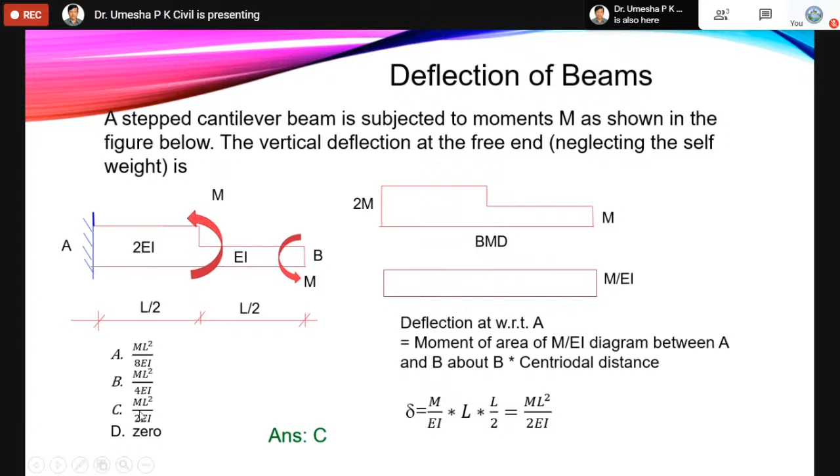So we'll take another problem. A cantilever beam PQR shown in the figure below. Segment PQ has flexural rigidity EI and segment QR is infinitely flexural rigidity. So this is very rigid one and this is having the flexural rigidity EI.

This is a rigid portion, and the load is acting at the free end. So the free end load can be transferred into an equivalent vertical load and a moment. So the equivalent vertical load W is acting at a distance L, and the moment is equal to W into L.

So you can calculate for this portion, the first portion with flexural rigidity EI, the cantilever beam, it becomes a cantilever beam modified as shown above. The deflection at Q equals the deflection due to vertical load plus deflection due to moment. If we add both, we get the deflection here. Similarly, you can calculate the slope. You should remember all the formulas for concentrated load, moment, UDL for cantilever and supported beams. In this case, only the cantilever one.

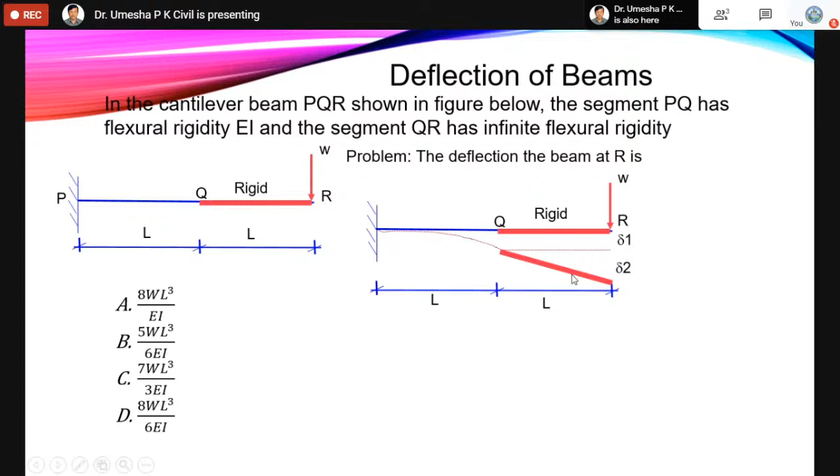So that will be delta 2. We want to calculate delta 1 due to this load, and delta 2 due to the vertical one, the slope into the distance, you can calculate. Since the QR portion is rigid, QR remains straight.

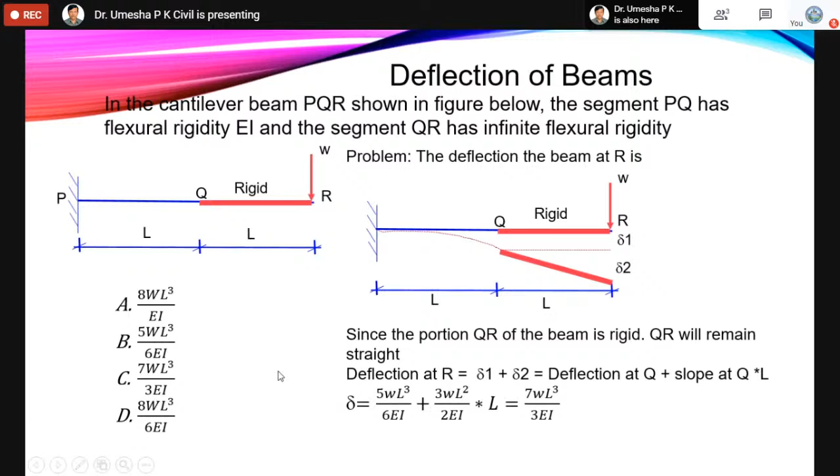Deflection at R equals delta 1 plus delta 2, that is the deflection at Q plus the slope at Q into L. Because it's a straight portion, you can take it as a small value, the slope into the length of the beam. So we calculate delta equal to 7WL cube by 3EI using this formula. So we'll take the answer, it is C, the answer is correct.

So we're interested to know delta 2. 10 into 2 equals 20 into delta 2, so delta 2 equals 1 mm. That is the answer, you have to put 1 mm.